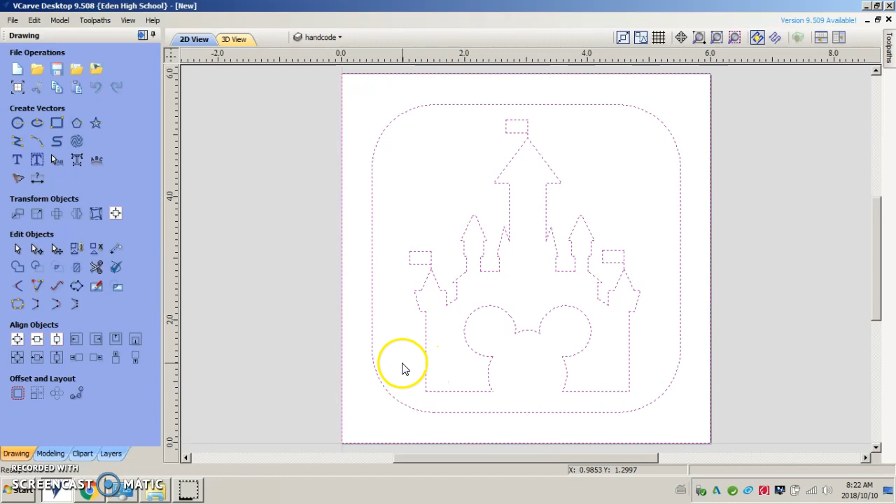We'll just hit OK, and we will import our drawing. That there will be our drawing that we're going to use. As you can see, I have different colors. The orange would be the cutout. The blue layer would be the one that I have coded by hand to give me my 150 lines. And the pink layer would be the one that this program will be engraving.

So first I want to turn my hand code layer off, and I'm going to turn the cutout layer off.

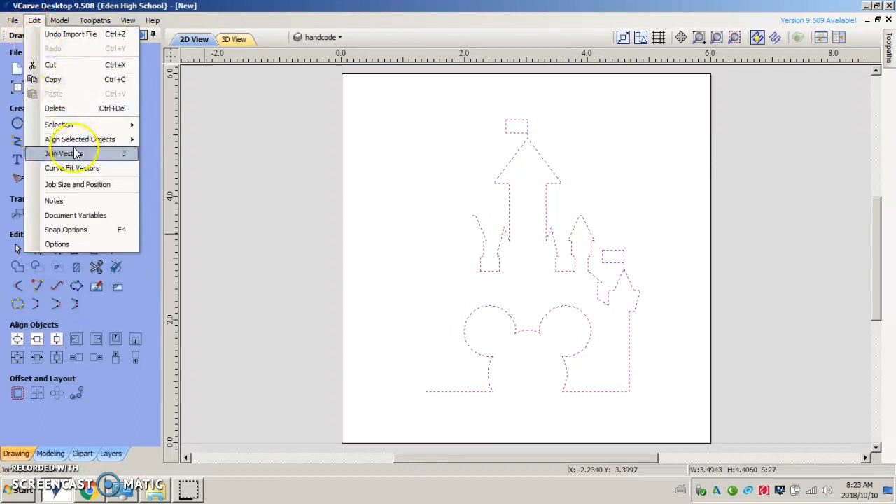Next step would be to select all of the lines that are on the screen, and I could either hit J on my keyboard or edit, join vectors, and I can see I have 27 vectors. I'm just going to join them, and you can see my hand code turned back on, so I'll just turn that off.

And I want to do a quick engrave, so I'm just going to click over here to my toolpath, which is up here. I'm going to do a quick engrave.

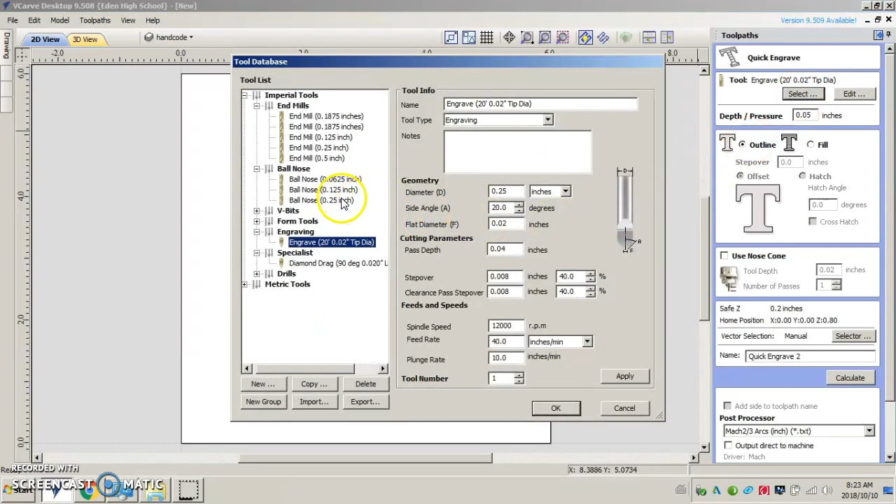For this engrave, I will need a ball end nose, this one right here, and these here are the numbers. You can pause the video to set your screen up if you don't have this.

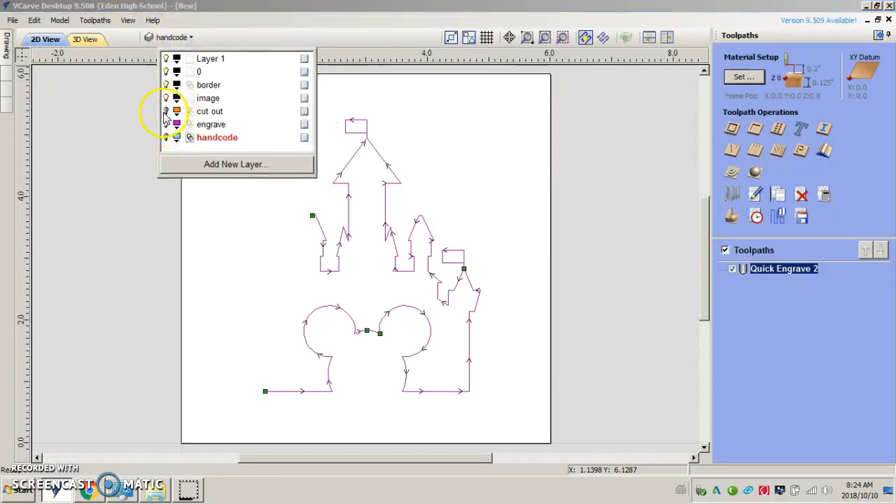I'll click OK. I'm just going to select the lines that I want in my operation, and I will hit calculate. You can see by the arrows the direction of travel the tool will go in, and I can hit close. Next, I will turn the cutout layer on.

I'm going to use a profile toolpath this time, which means that I would like to change my cut to depth all the way through material, 0.125. Again, I want to select that same ball nose end mill, and I will cut through.

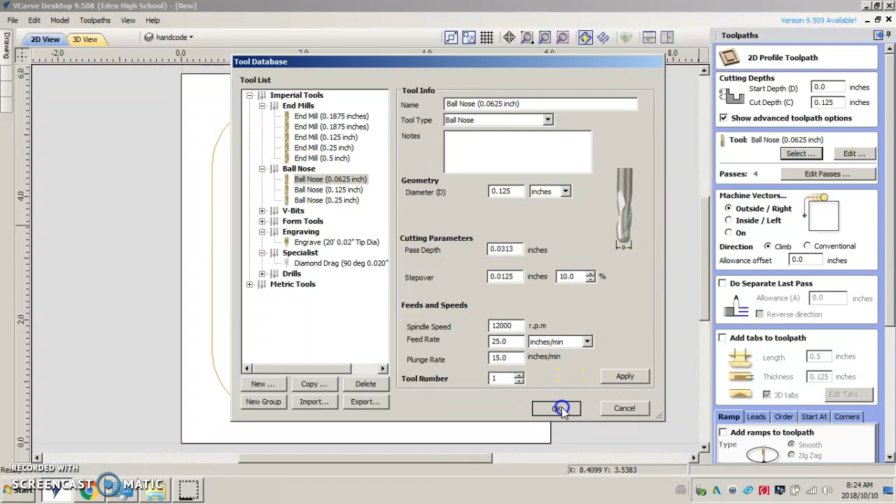I'm going to add some tabs to this. So I just hit edit tabs, saying I have nothing selected.

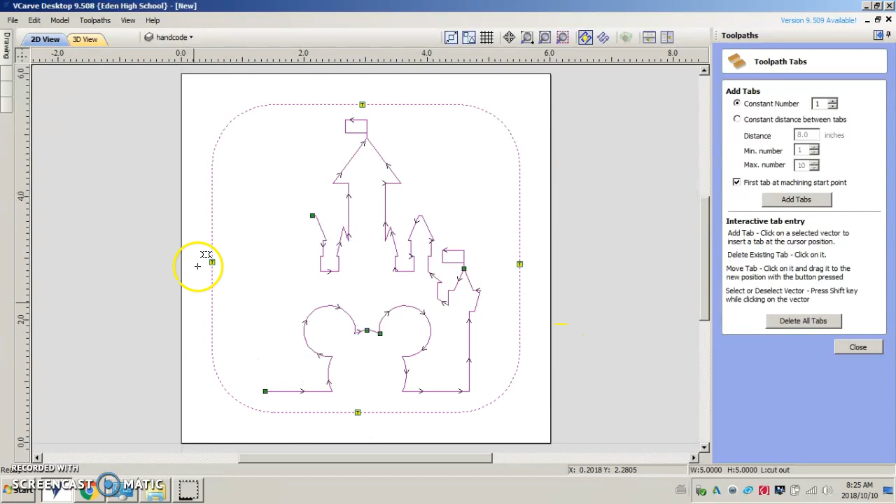I need to pick my outside line. It needs to know what to cut, and I am adding tabs to hold the cutout material to the clamped material. I can just hit close, and then I will hit calculate.

At this point, I can see what I am going to get. If I select everything, I should be able to hit my engrave tool and see what I can get.

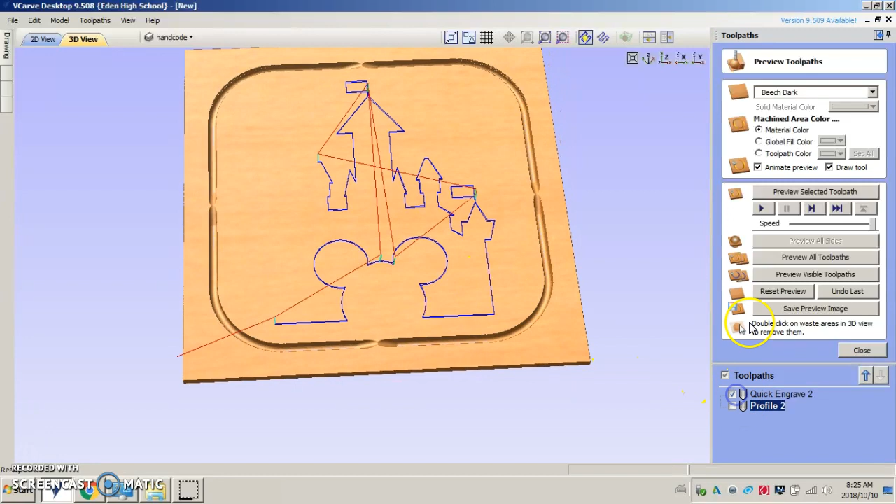At this point, we want to save the toolpath. We want to pick out of this long list, Mach 2/3 arcs inch. We will hit select our toolpath and save the toolpath.

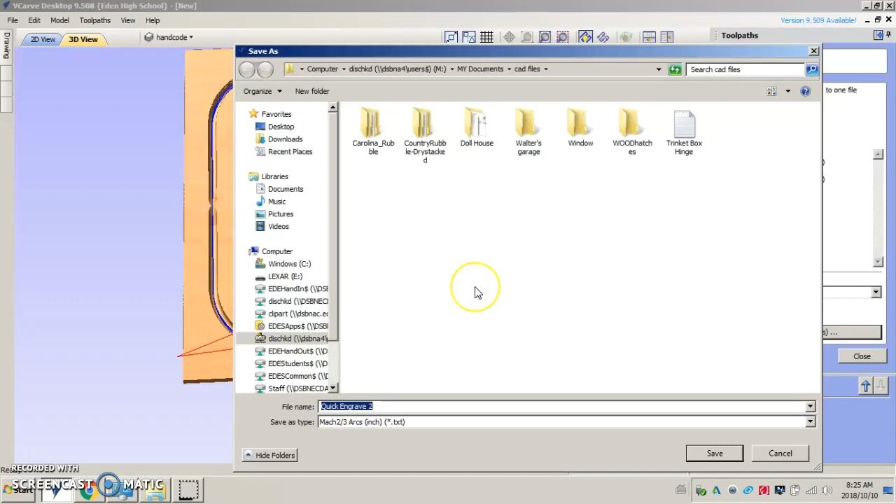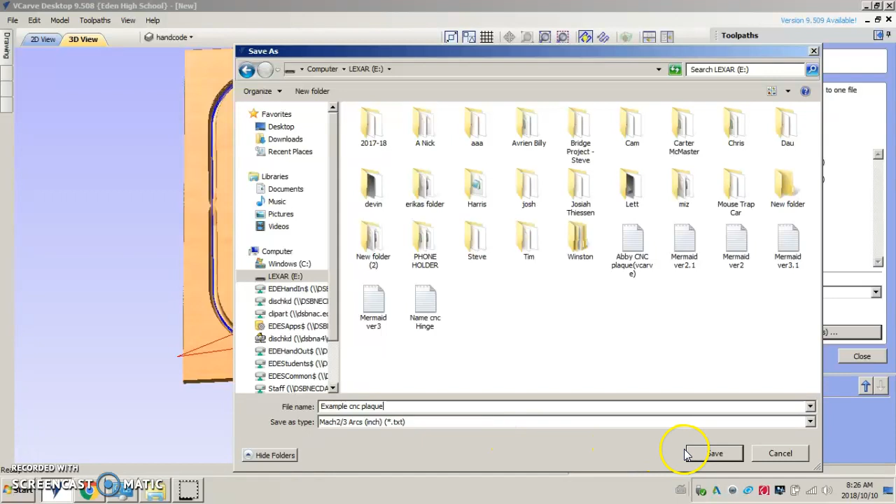First, you save it to your M drive, and then after that, you can save it to the Lexar, which is the thumb drive. Once we do that, then we take it over to the machine, plug it in, and off it goes.